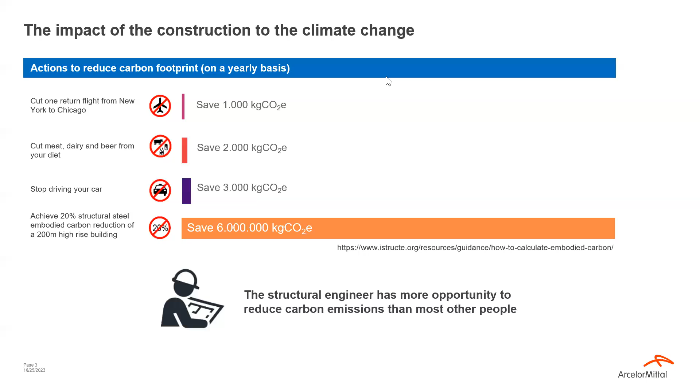Hello everyone, and thanks for joining our webinar. I'll make a quick introduction about the current context we're facing and the main initiatives we're launching here at ArcelorMittal, our X-Carb initiatives. I'd like to start with this slide, prepared by IStructE in the UK, which clearly highlights the role we have as structural engineers to face climate change, in the sense that we may have a much bigger impact than any other people.

You see here a couple of numbers—the gains anybody can achieve in terms of CO2 equivalent through personal initiatives such as cutting one flight, stopping eating meat, dairy and alcohol, or stopping driving your car. These are all very relevant initiatives and can help save some carbon impact. But if, as a structural engineer, you manage to achieve a 20% reduction of the embodied carbon in your buildings, the order of magnitude in reduction you reach is completely different. This stresses the fact that we really have an important role to play here.

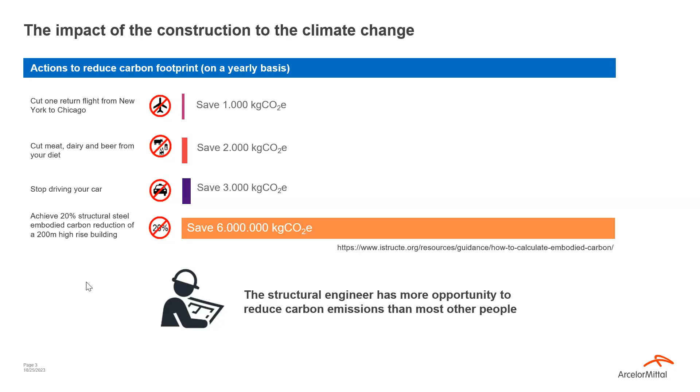Next slide, please. Indeed, another important number: construction consumes approximately 50% of total steel production worldwide. So once more, this underlines the fact that we, as construction stakeholders, should really get on board with decarbonization initiatives—as material manufacturers, but also as designers, architects, and so on. We really have a key role to play here.

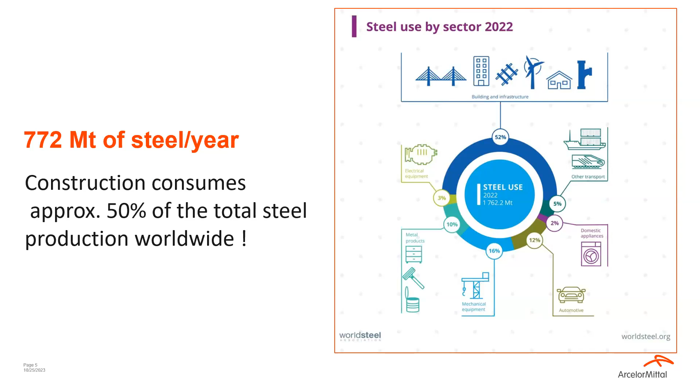Next slide, please. This, once more, was prepared by IStructE, and it provides a hierarchy for net zero design. It shows which priority we should give to different strategies when we want to design and drastically reduce our embodied carbon footprint. First of all, it seems pretty logical: it's better to build nothing. Is it really needed to build something?

Then we can also work on building less, meaning working on refurbishment and reuse, which can be leveraged thanks to steel products, since structural steel has many advantages for structural use. We can also build clever, using appropriate grids and structural systems. When we talk about steel, we should rely on high-strength steel when relevant, and put in place clever structural systems to build efficiently.

And here comes the low carbon materials—this is something we will highlight today. What do we have, what do we do, which products do we provide on the market to meet this low carbon material demand? It is really important, but it is part of a bigger picture. Finally, we have the minimization of waste while improving construction practices.

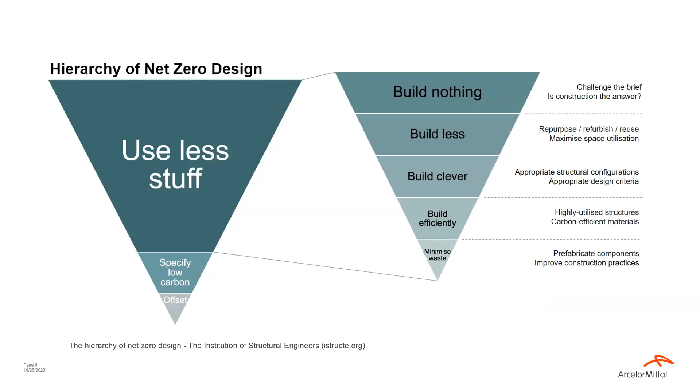So now we focus on X-Carb initiatives. X-Carb is the name of the label for everything taking place within ArcelorMittal to decarbonize steel production.

Here on this slide, I think it's important to get a rough idea of the global distribution of steel manufacturing worldwide. These numbers come from World Steel Association, and within ArcelorMittal we somehow follow the same trend, in that we have a big majority of steel produced from the blast furnace, basic oxygen furnace route, a very small percentage through DRI, direct reduced iron. These two production routes are labeled primary steelmaking because we're using iron ore. Then we have roughly a quarter which comes from EAF, electric arc furnace routes, using scrap, based on recycling, usually labeled secondary steelmaking.

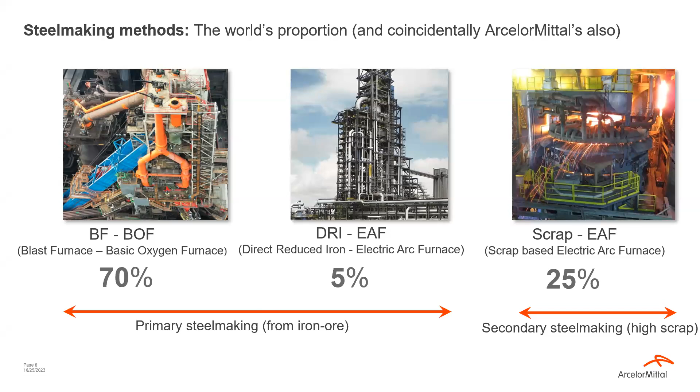So when we see these different production routes, we understand that we need to work with all three, and come up with strategies to decarbonize each one. We cannot only focus on one, we need to work with all three of them.

Here once more we have a little table showing the different production routes, with an example for section and merchant bars products. Starting from the left, the blast furnace route uses coal and iron ore as main inputs, with coal playing the role of the reductant. As an order of magnitude in terms of carbon emissions, worldwide average, we can have in mind 2.5 tons of CO2 equivalent per ton of steel.

Then we switch to DRI plus EAF, where we're still using iron ore, so still primary steelmaking, but instead of coal we're using natural gas as reductant. Here, in terms of order of magnitude, we roughly divide the number by two, so we are at about 1.25 tons of CO2 equivalent per ton of steel.

Then if we go to EAF using 100% scrap, which is what we do here in Luxembourg to produce our sections, we once more divide the order of magnitude by two, roughly 700 kilos of CO2 equivalent per ton of steel. And if on top of that we use EAF with renewable electricity, we can once more divide the impact roughly by two.

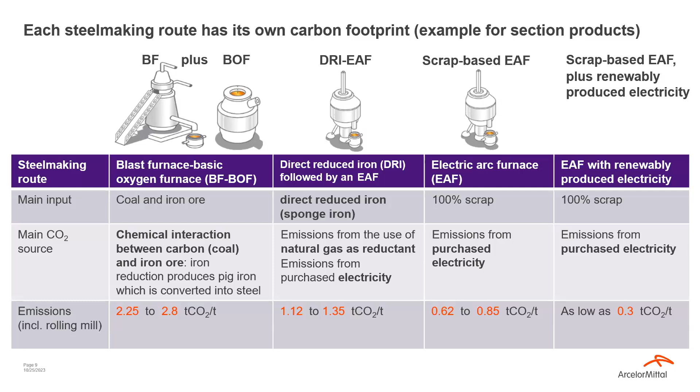Here on this slide you can see ArcelorMittal's decarbonization plan towards net zero. This is our roadmap for the whole group, worldwide. You can see that this roadmap is based on five main pillars.

The first one is steelmaking transformation. What is behind this word? We will slowly transition from our blast furnace, basic oxygen furnace sites towards DRI plus EAF. So we will really make significant industrial changes on our production sites.

Then the second pillar, energy transformation, we will be leveraging cleaner energy. One example is the Steelanol initiative at our site in Ghent, where we use blast furnace gases transformed into bioethanol, used for example in the transport industry. These kinds of initiatives are gathered under this pillar, energy transformation.

Then under the third pillar, C, increase use of scrap. If you remember the orders of magnitude from the previous slide, the EAF route provides really low embodied carbon. It seems quite logical, we need to recycle as much as we can, we need to leverage the scrap that's available to recycle steel.

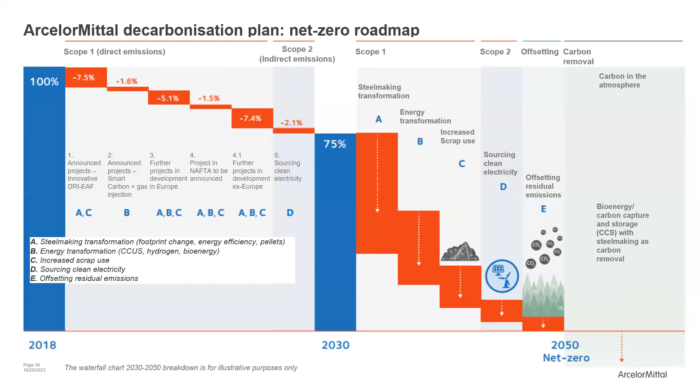Steelmaking transformation, the first pillar, as I told you, we will transition from blast furnace to DRI. Today DRI works with natural gas. The first step seems simple said like this, but it's actually quite complex. We need to switch from natural gas to hydrogen, meaning we need to make our installations technically operational working with hydrogen instead of natural gas.

At the moment, most hydrogen comes from petrochemistry, and we usually label this hydrogen as gray hydrogen, which makes it not a really sustainable alternative.

But there are many developments ongoing to source green hydrogen. What is green hydrogen? It is hydrogen obtained through water electrolysis. Using this, we can significantly decrease the embodied carbon through the DRI process. So this is what we're currently working on.

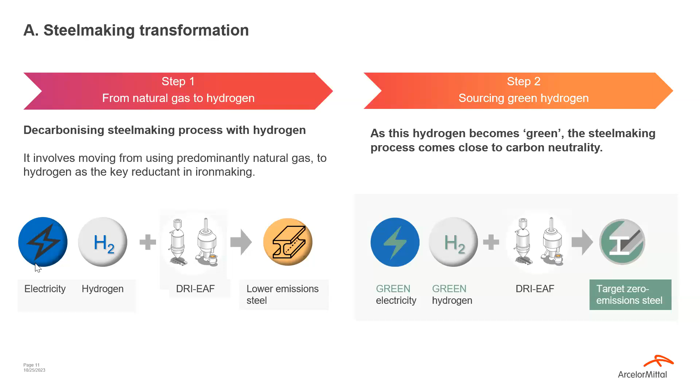On the next slide, you will see all of our sites which have already announced that they will switch to DRI plus EAF. Sestao in Spain will be the first full site to reach net zero thanks to this switch. It will start working from 2025 and will be able to produce around 1.5 million tons of steel per year. So it is a significant step towards our decarbonization objectives.

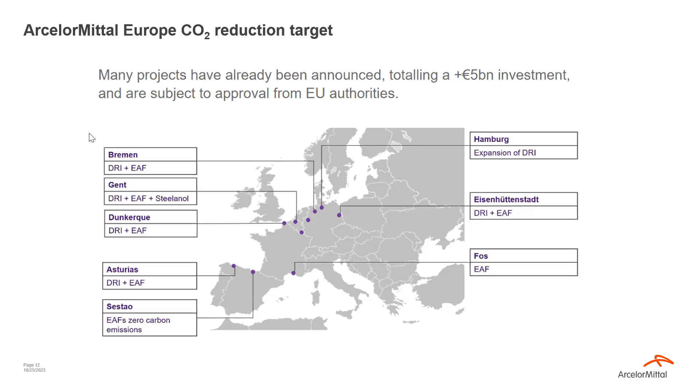I think it's also important to tell you that, while we're making a rough summary of what's happening here, if you go on our corporate website, you will be able to see all the updates towards our targets. It's very important to have a solid and robust roadmap, but it's equally important to communicate on our progress, where we are, and what has been achieved so far.

You can see some headlines here, but you'll get all the details on our website. We have strong deals in Spain and Germany to secure the sourcing of renewable electricity. We have our first DRI EAF site in Canada, which has launched very recently. Everything is transparent, and it shows that we are indeed making progress.

In terms of scrap, we are currently buying scrap from open markets, but recently ArcelorMittal has acquired scrap businesses because we really want to make sure that we source the right sort of scrap. So this is also something really important to know.

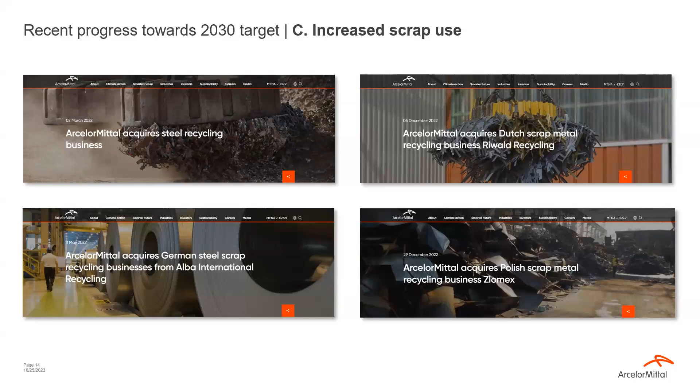And finally, before leaving the floor to my colleagues, I'll quickly tell you that within the XCarb umbrella we have mainly three families. The first is the Innovation Fund. The company invests $100 million per year into this fund, and this money doesn't go to ArcelorMittal itself, but funds other companies which we believe are necessary to achieve our targets. We're collaborating with other companies to make sure we create synergies to reach our targets.

Then we have the Green Steel certificates. Through these certificates, we quantify all the savings we make in terms of CO2 emissions, and these savings are externally certified and validated with DNV. We can provide these certificates to our customers so they can actively reduce their Scope 3 emissions. The final family is the recycled and renewably produced family, which covers products made through the recycling route, EAF, with scrap and renewable electricity.

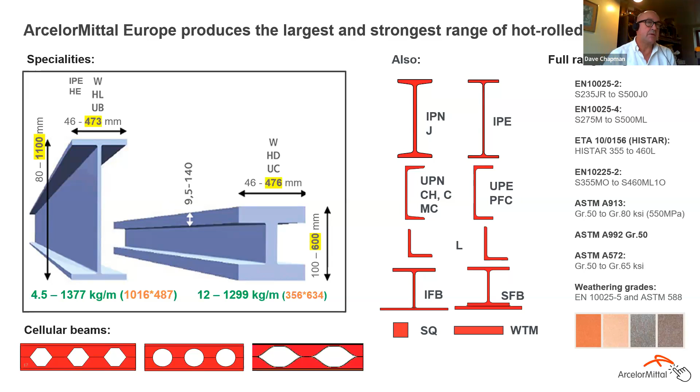The UK has a demand of about 12 million tons of steel per year. That's everything. And it has an internal capacity of about 6 million tons plus. So 50% of our steel in this country probably needs to be, or it does need to be, imported.

Part of that is our structural sections from the mills in Luxembourg and in Spain - Differdange and Belval in Luxembourg, and Bergara and Olaberria in Spain. These are all electric arc furnace mills being used here to supply the UK.

It's not a new thing. ArcelorMittal has been importing EAF steel to the UK for 25 years now. So it's just there at stockists.

Probably in terms of structures, supplying along with other manufacturers, about 40% of the structural market. That's being stocked in various places alongside blast furnace material. Typically there'll be 2 or 3 boats per week, up to 5,000 tons coming in. So there's regular supplies, and these are being stocked.

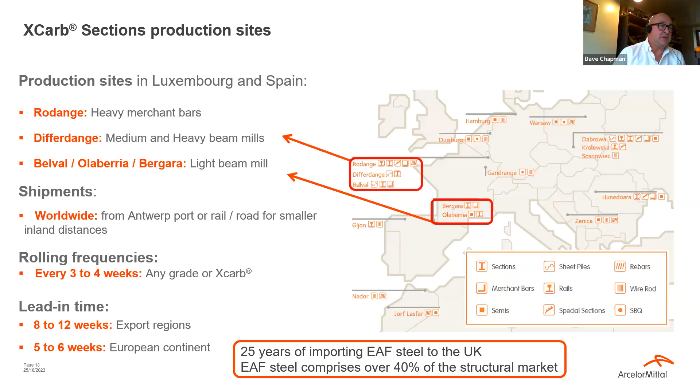The larger sections we spoke about earlier, they're rolled per project. They're not stocked readily, but as long as we know that they're coming, we can ensure that they are rolled for that particular need.

Many of you have seen this. This is an EPD, or Environmental Product Declaration, a method of measuring the energy used to make a particular product and lots of other things. There's 20 other lines of information on this certificate, some of which I'm not sure what they are, but certainly one I can read is GWP, Global Warming Potential.

This shows that the sections we're producing are at 333 kilograms of carbon equivalent per tonne, modules A1 to 3. And it's not just construction industry now that's using EPDs, other industries have taken on this format. These certificates are renewed every 5 years, or indeed when the manufacturer wants to.

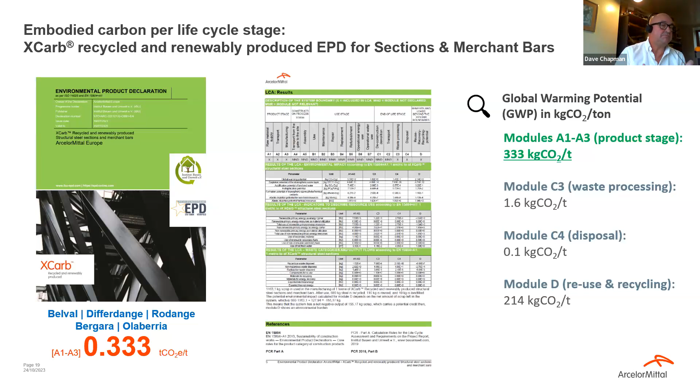There are calls for site-specific and product-specific EPDs. Some can be done, some can't.

An example of where our XCarb sections sit in the world compared to all steel is the largest red column, and then the average for sections is significantly lower, and there's great carbon savings to be made by selecting the right material.

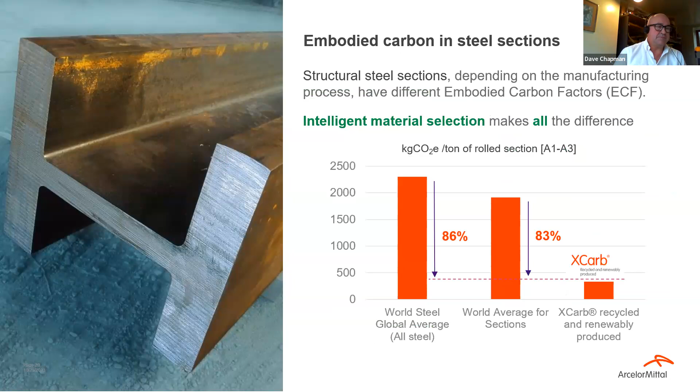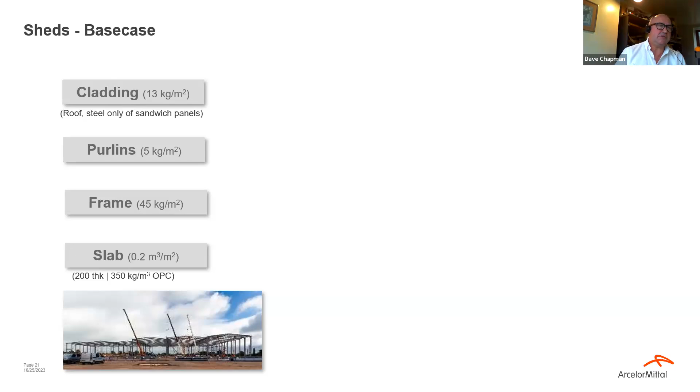So far we've been talking about carbon in terms of carbon per tonne for our particular product. But to be useful and applicable for other people, the metric of per metre squared for a building is helpful.

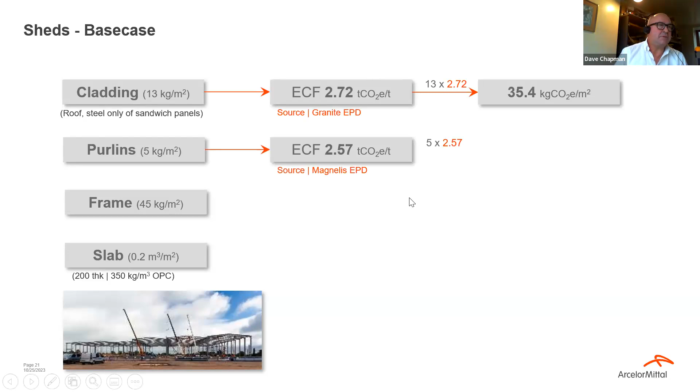We're going to look at a portal frame here - a lot about sheds and portal frames. So we're going to look at the elements: cladding, purlins, frame and slab. It was about 13 kilograms a metre squared for the cladding, just considering the steel element of it, since the foam was getting too complicated.

That multiplies through 13 kilograms metre squared at 2.72 tonnes per tonne, equivalent to 35.4 kilograms of carbon per metre squared. So there's a good metric we can use there.

Looking at the purlins, something similar. And of course, the frame is a big element, 45 kilograms metre squared, reasonable, giving us 110 kilograms of carbon per metre squared. Totaling all those things, including the concrete slab, regular concrete with no GGBS in that, gives us a total for a building of 230 kilograms per metre squared.

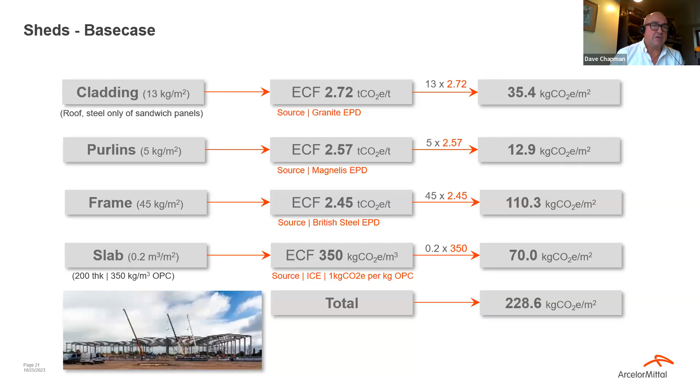Now that's regular. If we consider our X-carb offering, slightly lower for the cladding, again achieving 13 kilograms. The purlin is a bit lighter as well, at 5 kilograms, being 1,000 kilograms per tonne. The X-carb gives significant savings there of about 95 kilograms of carbon per metre squared. And again, for the slab, I haven't put any GGBS in that to reduce it, but of course that can be done.

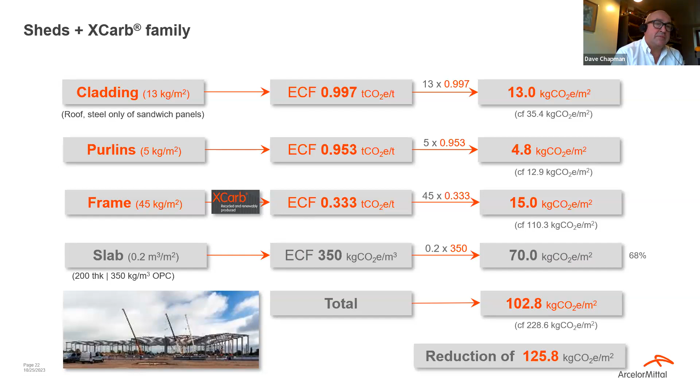So we have a reduction there of over half just by selecting certain materials. And that's pretty significant.

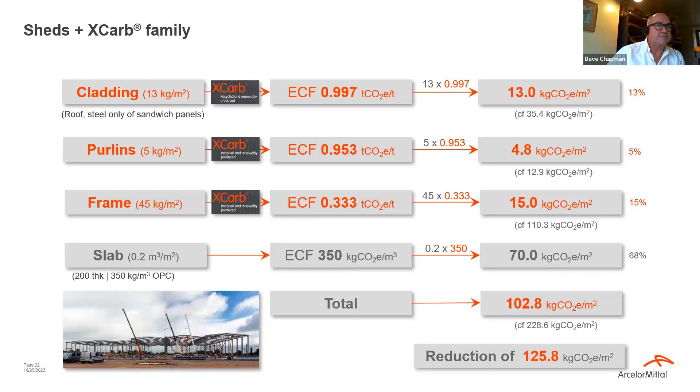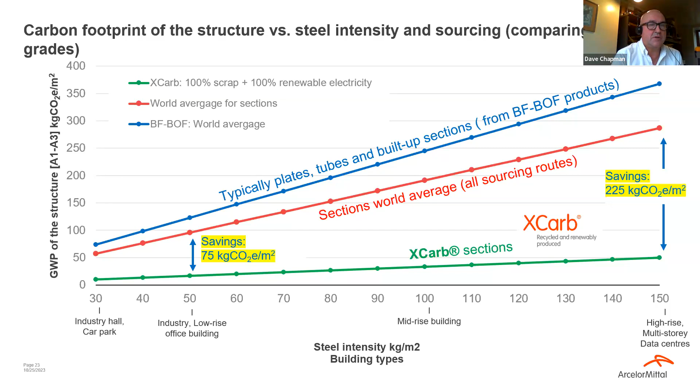Again, considering the metric of kilograms of carbon per metre squared, along the bottom we have different kilograms per metre squared for buildings, i.e. light buildings going along the horizontal axis to very heavy buildings, and up the vertical axis is our kilograms of carbon per metre squared. So these lines have been plotted, showing that the more low carbon material we use, the greater the savings will be as we go along, still sticking with kilograms of carbon per metre squared for a particular building.

We have people coming back to us now, checking this in arrears. Speaking to one engineer recently who said that there's someone on site checking it wagon by wagon so it can go along, and I think this is the way things are going now, so we can check our carbon input as it's happening on site.

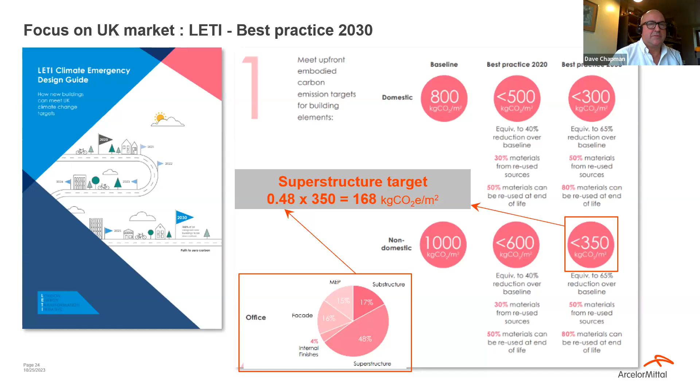And if we consider the proportion of superstructure by the box on the bottom, that's saying 48% of a typical office block could be superstructure, being frame and flooring. So we take 48% of 350, gives us a superstructure target of 168.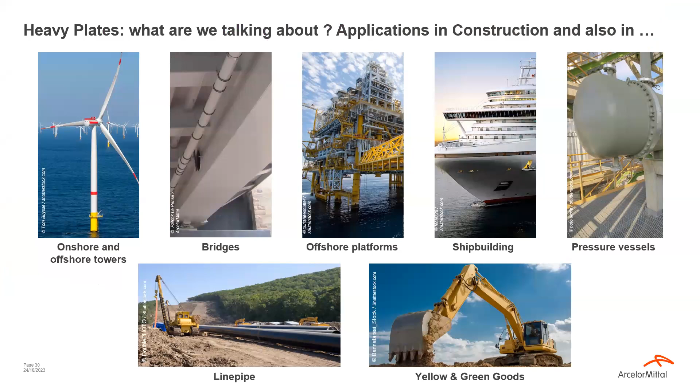Also, you can change the slide please, with the different applications. Okay, so also in shipbuildings, yellow and green goods, etc. So the ArcelorMittal production mill for heavy steel plates is actually located in Spain, in Gijón. This is in northwest of Spain.

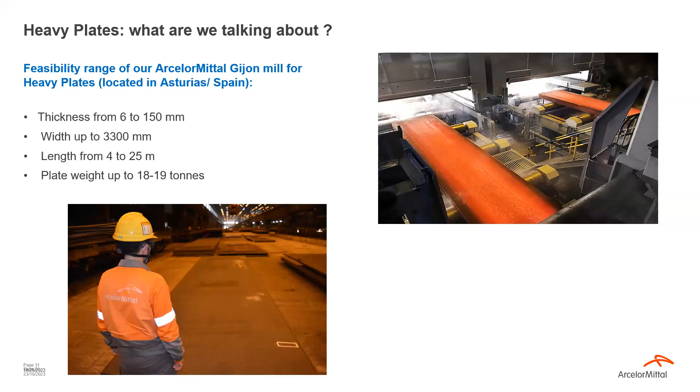The plates feasibility range of this mill in Gijón goes from thicknesses starting at 6 millimeter up to 150 millimeter thick. The width goes up to 3.3 meters width, length up to 25 meters, and the plate weights can be produced up to 19 tons, more or less. So this is a real competitive advantage since the markets, or since specific markets, for instance windmill towers, require heavy plates with increased weight.

At ArcelorMittal, we are currently excited and proud to present a new offer for heavy plates green steel. It is under our XCARB green steel umbrella, which was already introduced by Marion and Dave. Here we are talking about recycled and renewably produced, the so-called RRP, XCARB RRP heavy plates.

These heavy plates use slabs, which is the raw material or primary product to produce steel plates. These slabs are produced in an electrical arc furnace, the EAF, that we already explained. This EAF works with almost 100% very high quality scrap and uses 100% renewable electricity from wind energy, instead of the classical routes using blast furnaces with coal and iron ore. So here we are really talking about green electricity and scrap. Scrap, as you know, is recycled steel coming from various industrial, construction, automotive, or even household origin.

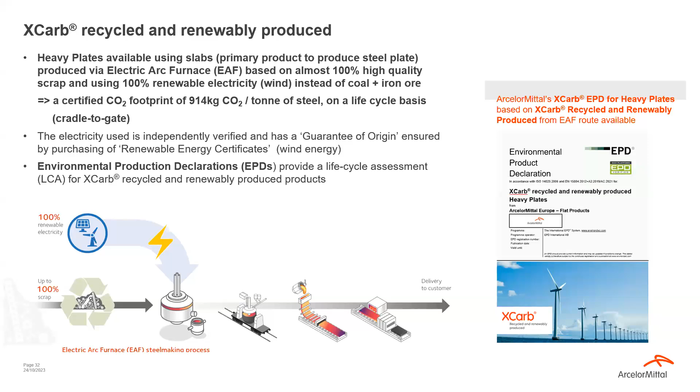The scheme below, I don't think we have to explain in detail. This is just very short information on the steel making process using an electrical arc furnace. In short, the steel is obtained by melting scrap in a furnace, and the liquid steel afterwards is transformed into slabs and then rolled to the finished plates.

To resume, thanks to the XCARB RRP plates, we can today offer a real physical steel plate with a reduced CO2 footprint by more or less 65%.

So you see the industrial process chain, it looks like this: the slabs are produced in another ArcelorMittal mill and then transferred to Spain, to Gijón. The plates are then rolled and processed in our heavy plate mill in Gijón. And if we count all the CO2 accounted on each step, on each process, we achieve best in class for this kind of product, actually a value of 0.914 tons of CO2 produced per ton of steel.

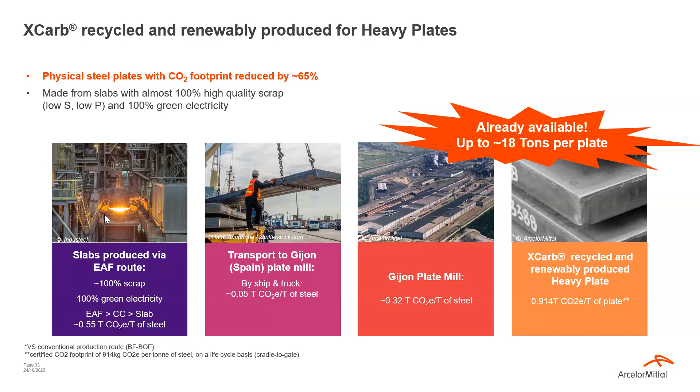This environment preserving performance also benefits other steel elements in construction, like welded sections, which are a key component in building and bridge construction. Welded sections based on XCARB RRP heavy plates have a CO2 equivalent footprint reduced by approximately 60% compared to if they would have been produced with conventional heavy plates. This is really a huge improvement. Typically 18 ton heavy plates are used in major infrastructure projects, for example in welded sections or even box girders for roads and rail bridges.

Using these RRP steel plates in civil engineering projects allows us to reduce Scope 3 emissions and contribute to a much lower carbon footprint for infrastructure projects. Scope 3 applies to the emissions coming from the supply chain. Maybe I can explain this a little bit later if we have some time left.

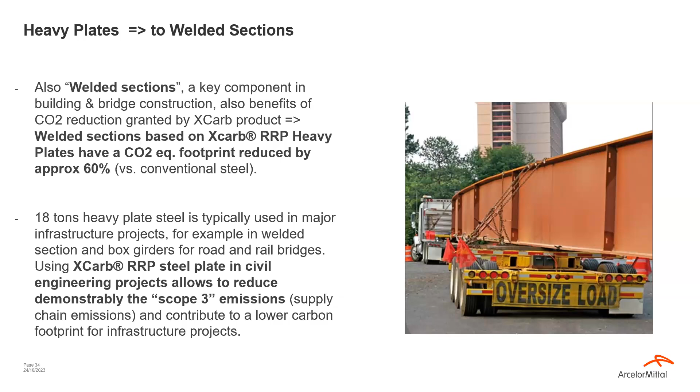It's also important to know that this significantly lower footprint is documented officially, and that's why we have this EPD, this Environmental Production Declaration, which is available. This is the document that can be downloaded and goes together with the RRP heavy plate.

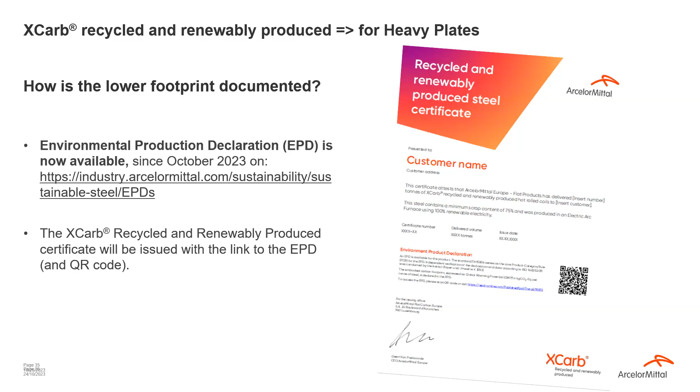Alternatively, also interesting to mention, as already mentioned shortly by Marion before, we can also offer XCARB with green steel certificates. These green steel certificates are designed for conventional steels, the ones made by the blast furnace route that uses coal and iron ore. In this case, we are not speaking about real green steel. It is classical conventional steel heavy plates, but together with the certificate.

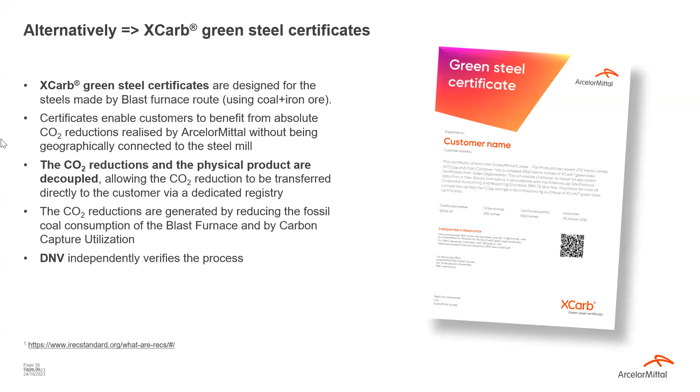Just to explain shortly the approach of the Green Steel Certificate, or GSC: the CO2 savings are achieved in our different industrial facilities throughout Europe, not especially in the Spanish mill, but in other industrial sites. For instance, thanks to the investments we are doing, or process improvements leading to lower fossil coal consumption, to keep it short.

All these savings are then transferred to the users, to the customers, by purchasing these certificates via a dedicated registry. And all these savings are verified officially by a third party, an independent third party. In this case, it is DNV. So it is something which is recognized, official, and certified by DNV.

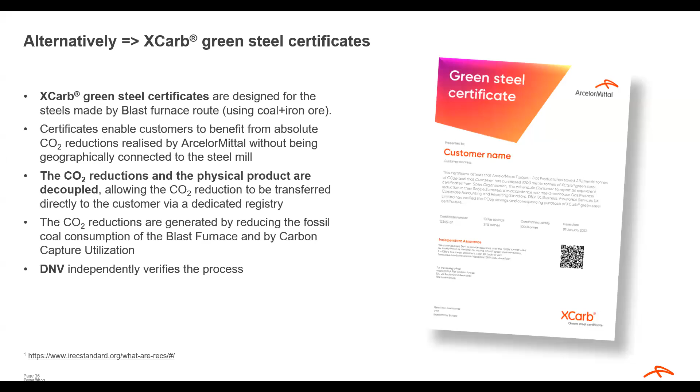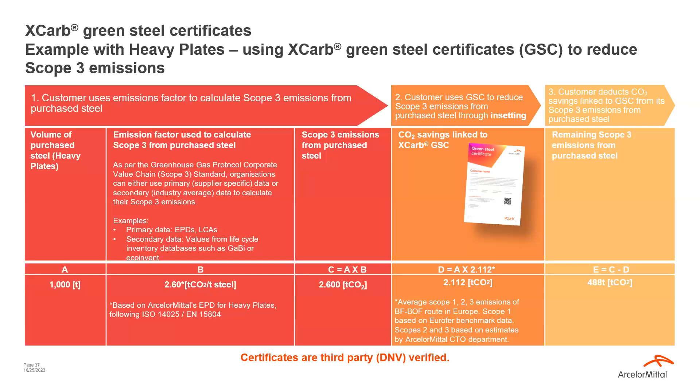To finish the information on heavy plates, thanks to this certificate, it contributes to reducing CO2 emissions from scope 3 as per the Greenhouse Gas Protocol Corporate standard. The EPD we give for the conventional steel produced in Gijón has a global warming potential of 2.6 tons of CO2 per ton of steel. By purchasing this certificate, this value drops from 2.6 to less than 0.488 tons of CO2, which is significantly lower and can be deducted from the scope 3 emissions.

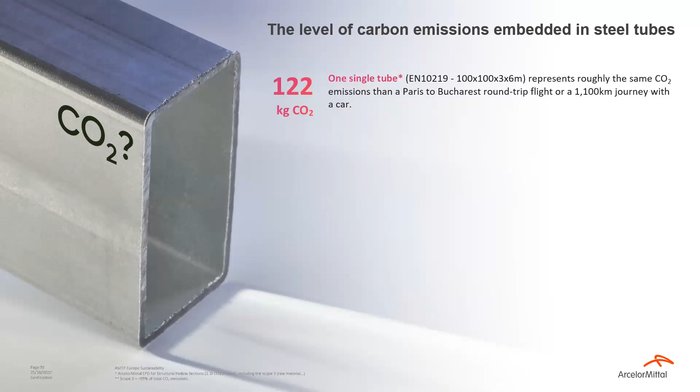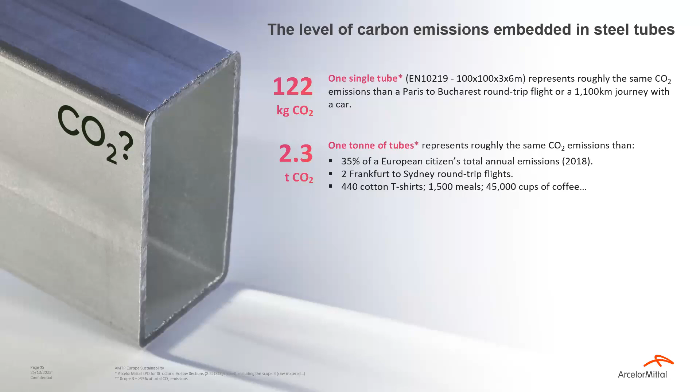If we take 1 ton of steel tubes, moving forward, this would release into the atmosphere 2.3 tons of CO2, roughly the same carbon emissions as more than one third of the total annual emissions of a European citizen for a year. That's equivalent to Frankfurt to Sydney flights, or 440 t-shirts, 1,500 meals, a lot of cups of coffee, etc.

But luckily, even if steel tubes contain a lot of embedded carbon, they can also be part of the solution, because it's our responsibility as a steel tube producer to decrease the carbon content and to offer alternatives. Steel tubes can also be a solution in this transition towards building efficiently, as Marion mentioned in the introduction, the smart design and the sustainable construction, because it can be used almost anywhere: building cranes, scaffolding, structures and frames of buildings, sprinkler systems, even in renewable electricity generation such as solar panel structures, the skeleton of windmills, etc.

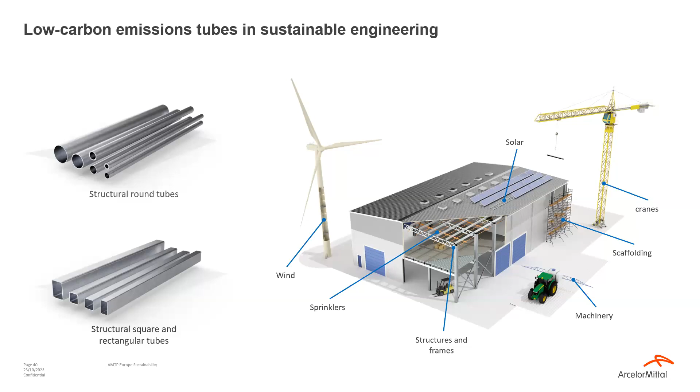Moving forward, a lot of things have been moving recently within our division to realize this vision, especially since last year. It can be split broadly into three main categories: sourcing cleaner material, production of low carbon steel tubes, and transport. First, the sourcing of low carbon emissions material.

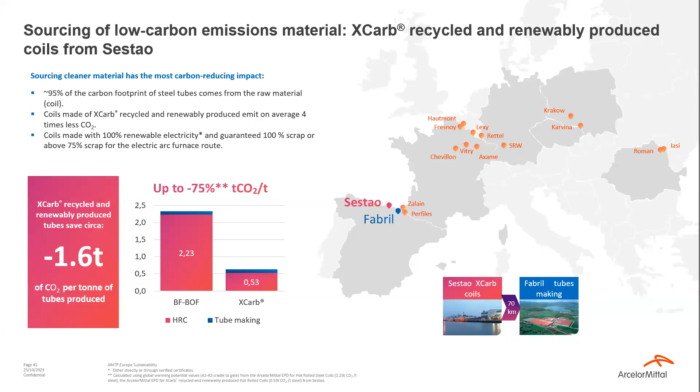Moving forward to the second component of our supply chain: this was also strategic because our production site, Fabril, in northern Spain, is really close to Sestao. So we could also reduce the carbon negative impact of transporting the raw material to the production site. But we also wanted to go one step further and use only green or renewable electricity for this production, certified by Guarantee of Origin certificates.

Thanks to all that, we are able to produce and offer for the first time in Europe low carbon emissions hollow structural sections according to the standard EN 10219. More is in development, stay tuned for the next releases. It's also available in various coatings such as Sendzimir, galvanized, and Magnelis.

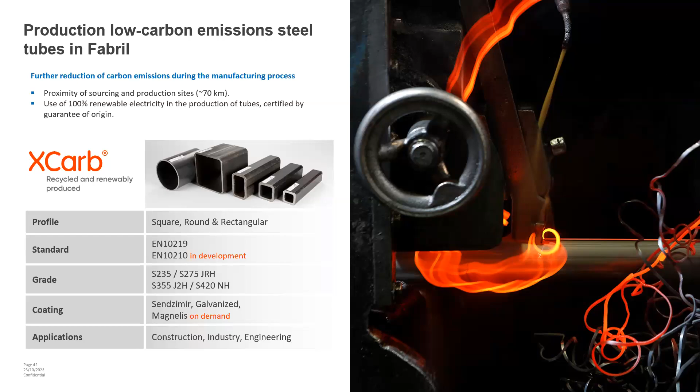For us concretely, it means, for example, shipping the steel tubes from a port in northern Spain, in Santander, close to our production site, to northern ports in Belgium, the Netherlands, or the UK, leaving only the first and last miles with the truck for delivery to the customer.

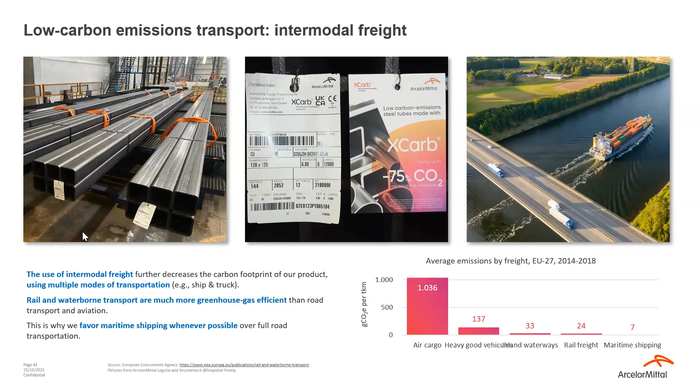As my colleague Frédéric mentioned earlier, projects are complex by design, and we have the experience of customers telling us they want to approach their sourcing as a whole in terms of Scope 3 emissions to reduce, not only cherry pick one low carbon material and then use the rest with a high carbon footprint. We are able to offer these recycled and renewably produced steel tubes, but also, for dimensions and products not yet covered by this offering, green steel certificates, so it can be taken as a whole for a full range Scope 3 reduction for our customers.

On the next slide, last but not least, how are we able to justify our numbers? Again, with environmental product declarations. My colleagues also explained this document very well. What's interesting to note is that we have EPDs for the past couple of years for the main categories of our traditional products: hollow structural sections, seamless pipes, welded pipes.

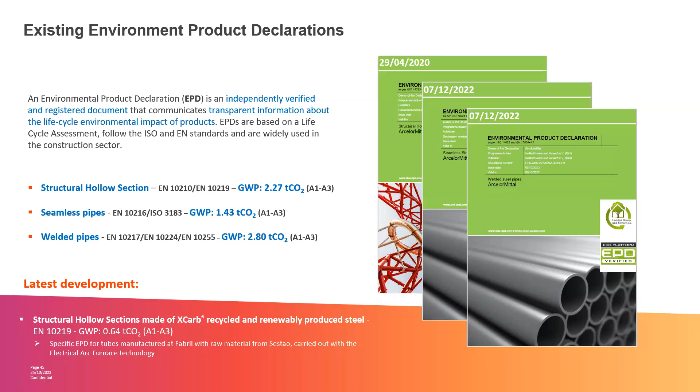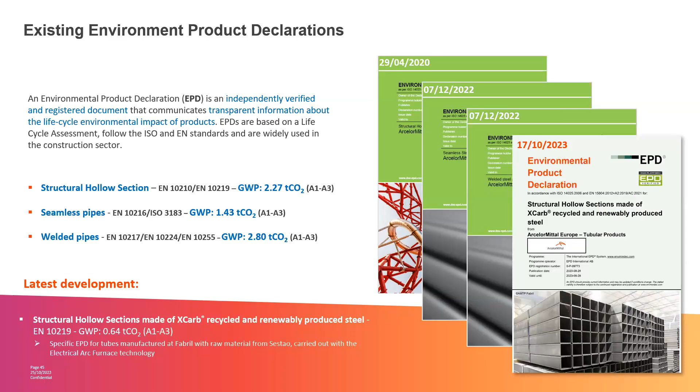And of course, the last development, since just a few days actually, the EPD is also available for the offering I just mentioned, XCarb recycled and renewably produced steel hollow structural sections made in Fabril, with a very competitive carbon footprint of 640 kilograms of CO2. And that's all for the tubular part. I thank you for your attention.

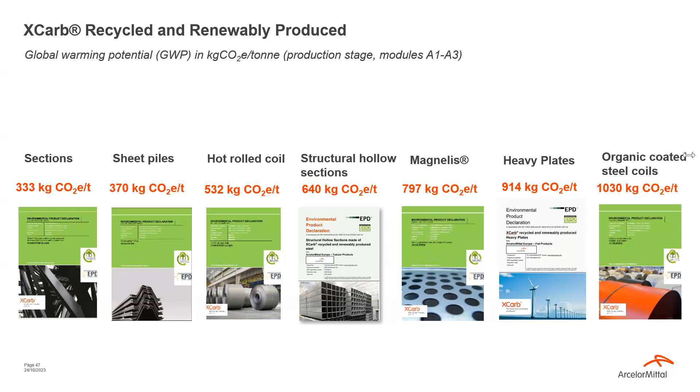So if you go to the next slide: here we've been talking a lot about low carbon materials, the different EPDs we have, and the initiatives we launched to decarbonize the manufacture of steel products. Indeed, choosing low carbon materials is of significant importance, but it is not sufficient. We should not stop here in our approach to decarbonizing construction. On top of this, we should use clever design to further reduce the carbon footprint of the project.

So what do we mean by clever design? It can cover very simple things, but we should really try to think of the project as a whole, not optimize one element here and there, but have this holistic picture and make the global optimization of all the criteria, leveraging everything possible for us as structural engineers.

Here on this slide, I provide a very simple example that will be clear for everyone. For example, we've been developing high strength steel for a couple of years. If we use higher steel grades with higher yield strength, globally speaking, we can reach a lighter superstructure. So first of all, we'll be able to decrease the total amount of steel required for the same purpose. We're not even talking about low carbon material here, but because we have less steel, we have a lower environmental impact.

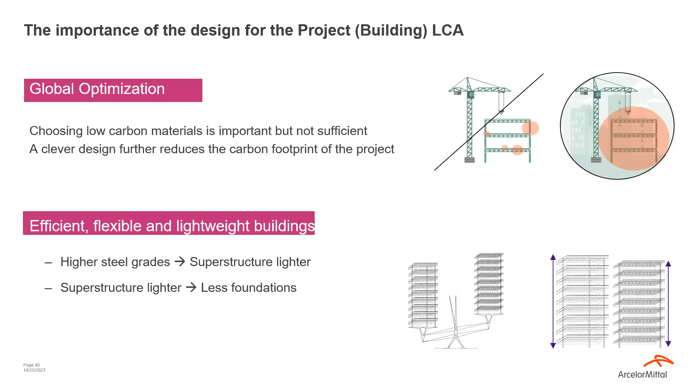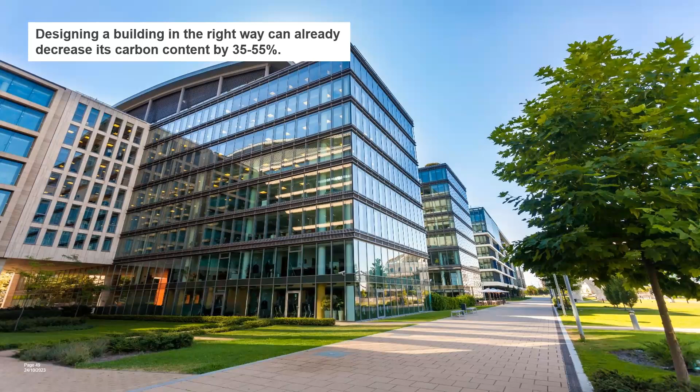Yes, and so we have made some examples here with Steligence engineering, and we can show that designing a building in the right way, using these clever structural approaches, we can already decrease its carbon content by 35-55%. So we really need to keep both aspects in mind: low carbon material, but also efficient structural design. If you're interested in these case studies, don't hesitate to contact us. We don't have time today to go through them, but they're publicly available, and we'll be happy to take you through these examples, which have been made for different types of projects: offices, warehouses, industrial buildings, and so on.

And that is the final slide, to simply tell you that we're here to support you on your journey. First of all, as a steel manufacturer, it is highly important that we decarbonize our production, and today I hope we could give you a rough summary of everything taking place here. But on top of this, we are also here to provide technical assistance, to advise you on the best structural systems for your given project, to identify carbon intensive elements, to develop appropriate strategies, that kind of thing. We have a dedicated team for that, so really do not hesitate to contact us.

We have a lot of things to say in a very short amount of time today, so I hope everything was clear. But in case you have generic questions or more specific questions related to your specific project, we are always available to

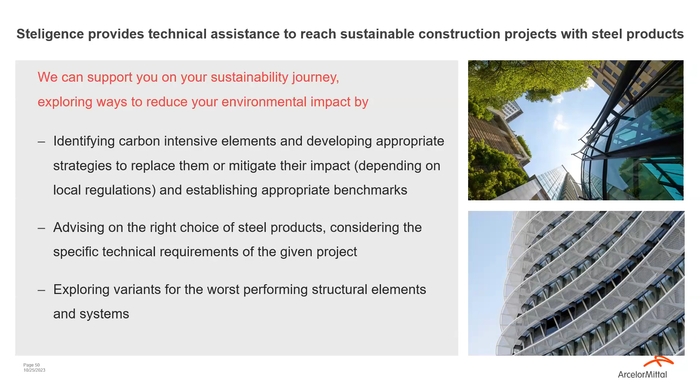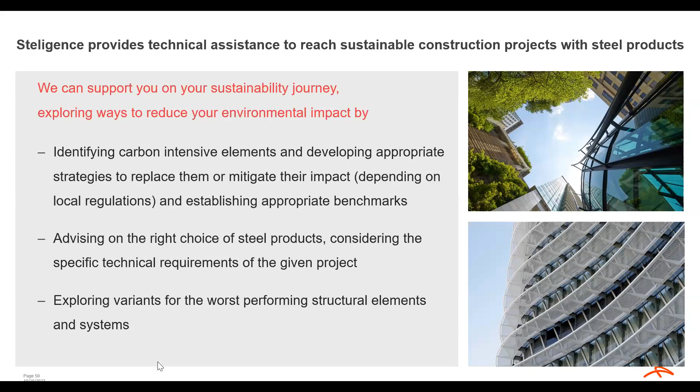And how competitive can ArcelorMittal remain versus non-decarbonized producers, Marion? I would say that to a larger extent, we can talk about competitiveness, of course, but it becomes mandatory to be able to provide low carbon solutions, in a sense that each one of us needs to make efforts in order to fight climate change. I think this is something that we, as individuals, have this responsibility on our shoulders to every day do our best to decrease the environmental footprint of our activities. But on top of that, for example in Europe, we see more and more regulations coming to market which are providing strict criteria to meet in order to be able to build.

So for example, in France or in the Netherlands, you are forced to use EPDs to perform a life cycle assessment and to showcase that your project will be below a certain threshold of kilos of CO2 equivalent per square meter of your project. So of course, ArcelorMittal is at the forefront of decarbonization, and we are doing our best to remain competitive, but it's really becoming a need. It is really something that we must do in order to secure a sustainable built environment. We need to be able to provide low carbon solutions, and it is really becoming more and more mandatory on the European market. There are slight changes in the different countries—of course the methodologies differ slightly here and there—but globally speaking, they all rely on the use of EPDs, life cycle assessment, and so on. So it is something which is becoming key.